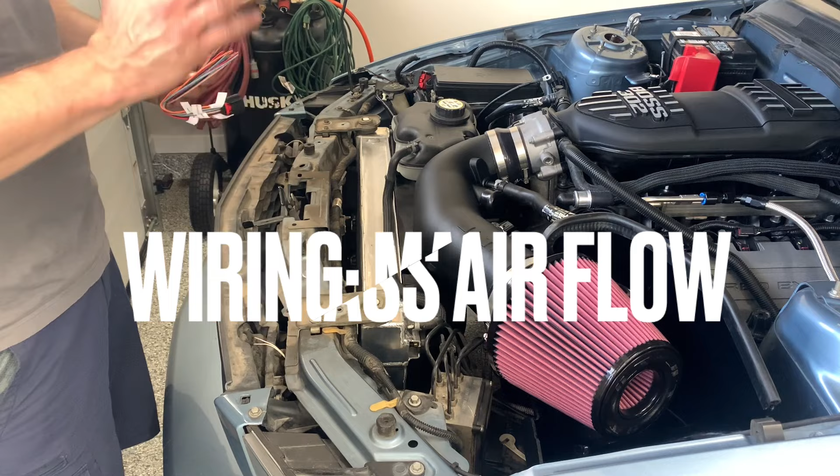Now that we got the fuel system all done, it's time to start with the wiring. First thing we're going to do is probably one of the longest wire harnesses I have to make, which is about 36 inches, maybe even short. So anyway, this is the MAF harness from Ron Francis.

I'm going to hook it up to the MAF and build my own harness. I was thinking about looping it in here and getting it to the body connector, but as you can see, it's going to have to go over there if I want to make it clean. It actually comes up short, so I might bring it around to the engine, which I don't know if I'm a fan of, but I'll show you which way I go once I decide.

One thing I wanted to touch on is that we're only using 4 wires from this harness, because this is for the 05 to current Mustangs. So we're not even using the 2 outside wires.

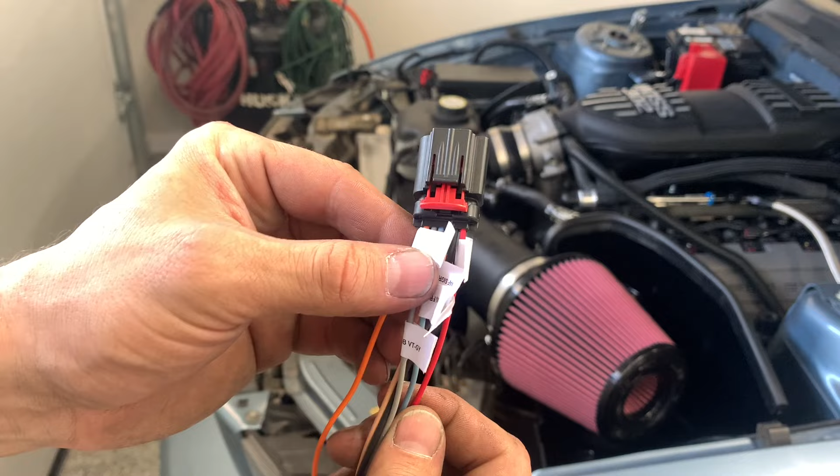I have these labeled myself—this is not how they come. This is from my own research and the spreadsheet, which I will be plugging a lot today, that I know which wires have to go where, which pin, which color it's actually going to go to on my used PCM body connector, which I suggest going. So I have which pin it's going to, they're all going through the body connector, and what color that wire is. This is all pre-labeled months ago, but it's going to come in handy now, and you can kind of take this as your strategy if you want to not use a control pack.

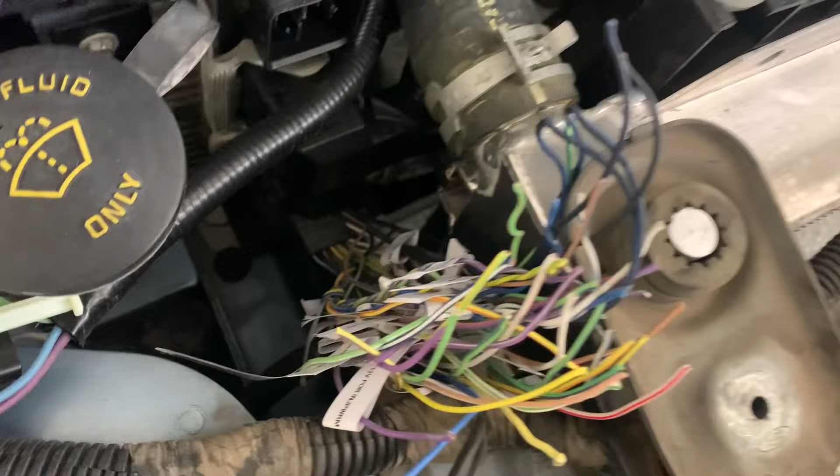After a little further review, I feel like sneaking it around in here is my best bet. I also forgot that I have a bunch of wire length coming off of the body connector—I grabbed that off camera. So I'm going to have the length to work in here, I'll just have to find it. That's also labeled with the help of my spreadsheet.

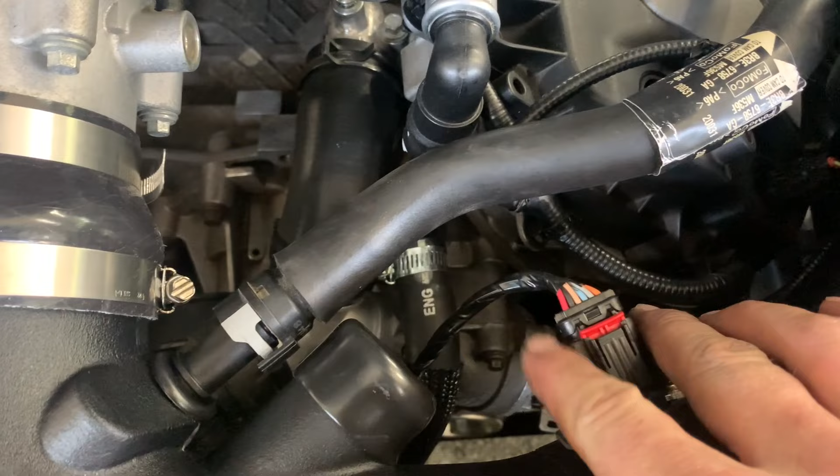A little plug again, but yeah, so what I'm going to do—I already cut the 2 outside wires somewhere down here and shrink wrapped the ends, then taped the ends. I'm going to add some conduit similar to this stuff, make it all look factory, come in through here, and then I can finally put the radiator cover in and have that buttoned up the way I want to. And you notice I got the JLT intake on there, and start wiring this thing.

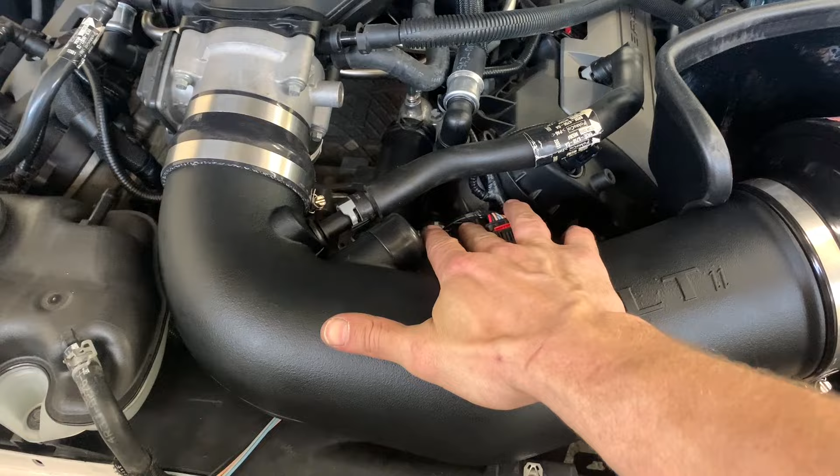This is probably going to be one of the easiest circuits to add, because this was usually part of the engine harness in the 4.6. As I've said before, it's part of the body harness in the Coyote cars. Now, looking at the factory wiring diagrams, this actually goes into the headlight harness, goes through there all nice and neat, and then gets branched off into the body harness connector. This will be fine, but it also makes things a lot easier.

It's going to be one of the first circuits we make. It's kind of a good place to start, just to get you comfortable with pins and stuff. You don't have to take anything apart yet.

I still haven't brought myself to cut that yet, or de-tape it even, but the body connector is plugged in. So before actually making the MAF connections, I'm going to de-tape that and see where everything's going to line up, because I don't want to start having a mess right off the bat. I want everything neat, because this is probably going to branch off into that direction where that one is going. So I don't want to sell myself short on having these wires go there, because I probably want the branch to come out here. So there's still a chance I might come up short with these wires. Just a little hot tip there for the MAF side of things.

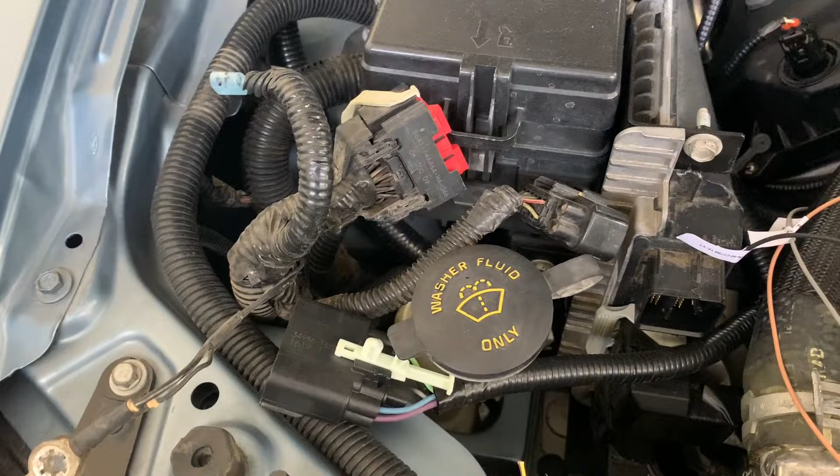Before I proceed, I'm thinking I might take the washer fluid tank out to just have easier access to everything, because I think one of the things I'm dreading is getting in there and not having enough room to crimp stuff right, since it's the bottom connector in the PCM. So I think that's what I'm going to do—maybe a hot tip.

We'll see how it works. I'm not sure how it is to take out, but it's probably just the inner fender liner and maybe a couple few bolts. I decided to take the plunge, and I know it's definitely gonna be worth it.

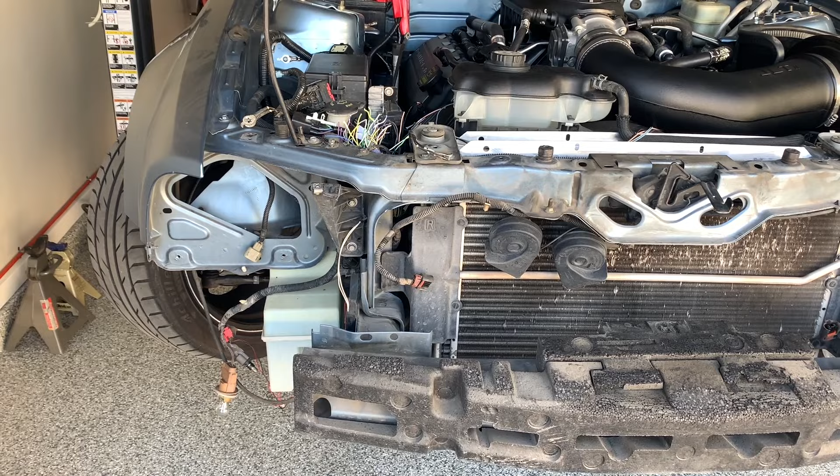Bumper delete, headlight delete. Next is washer tank delete. What's going on back there? Oh, look at all that angle.

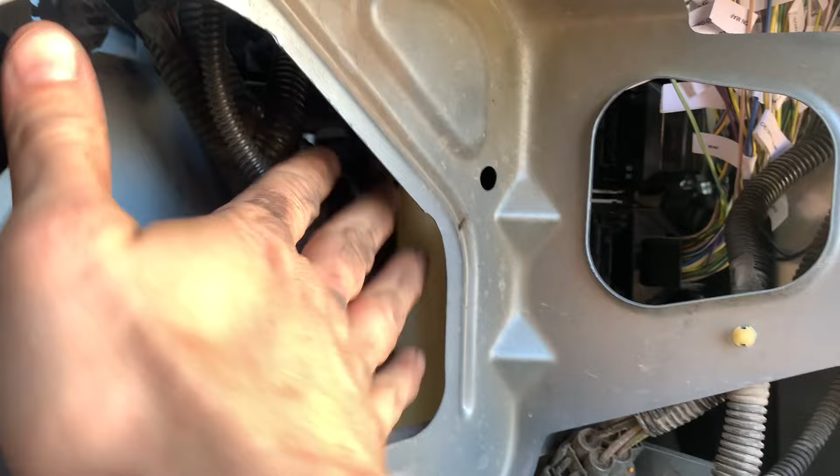So all the wiring is going to end up being right behind here where all the splices are going to end up. So I figured it'd be a good idea to get rid of all this stuff, especially the washer tank. It's going to be right in the way. So yeah, I would definitely do that if I were you.

I got the fuse box unlatched. You notice there's one big connector missing, and headlights out, ready to work on over there. That missing connector is actually from the engine harness.

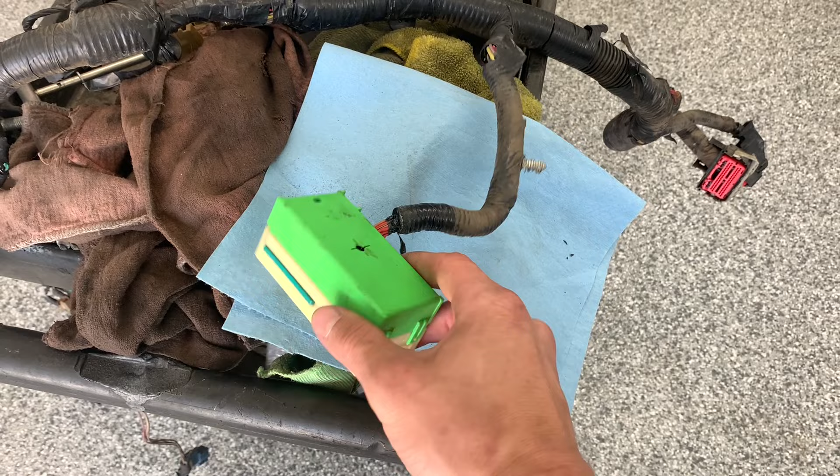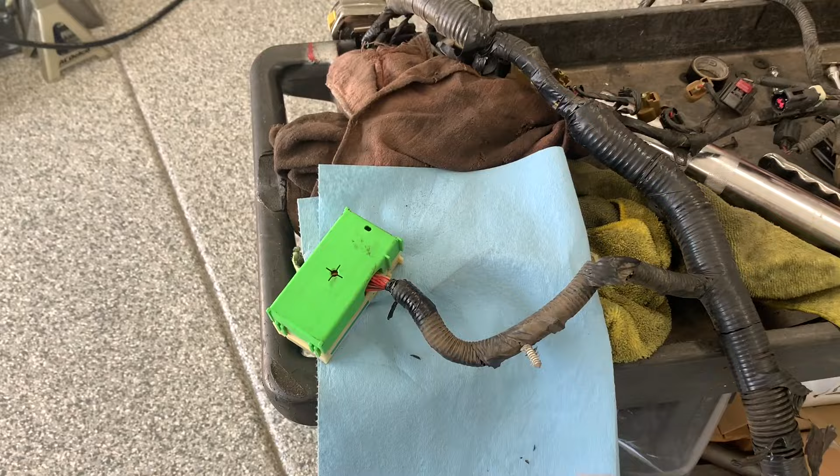So this is what they did for the inline, to feed the coils, injectors, all power. Your starter feed wire is in there too, along with AC requests and whatnot. So I'm gonna be untaping that and kind of get as much wire out of there as I can so that I can reach it without having to make too many splices to the inline and other circuits that I gotta make.

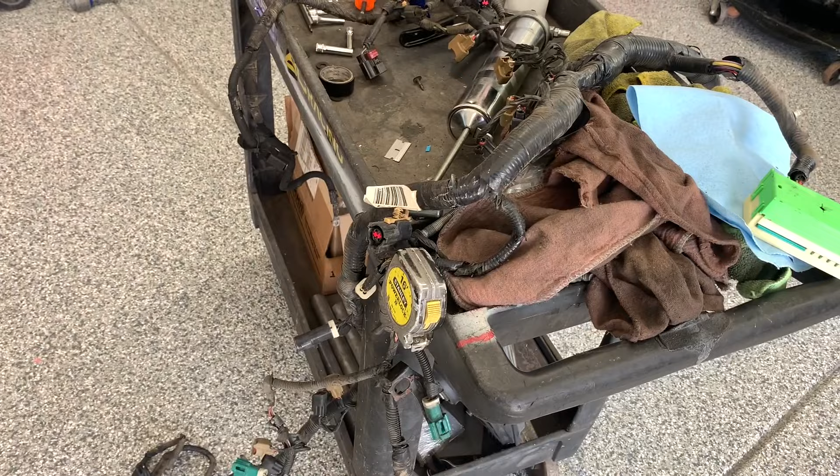So yeah, and got some loom wire. Probably only have to use this for the mass airflow sensor. And I'm gonna make it all nice and neat.

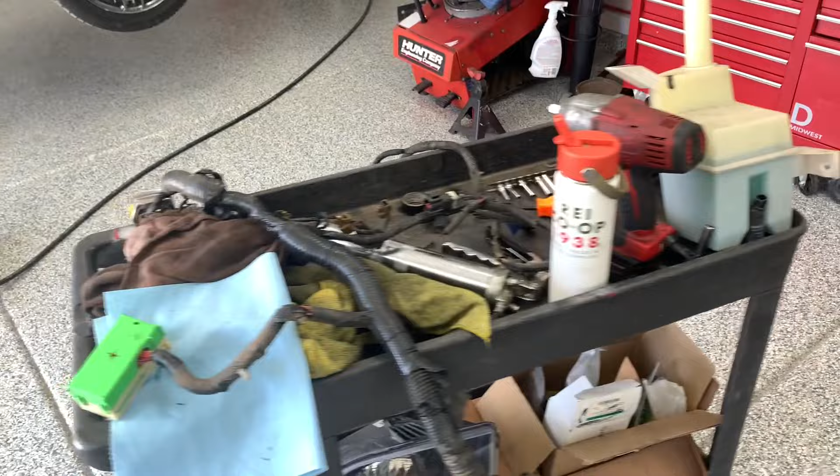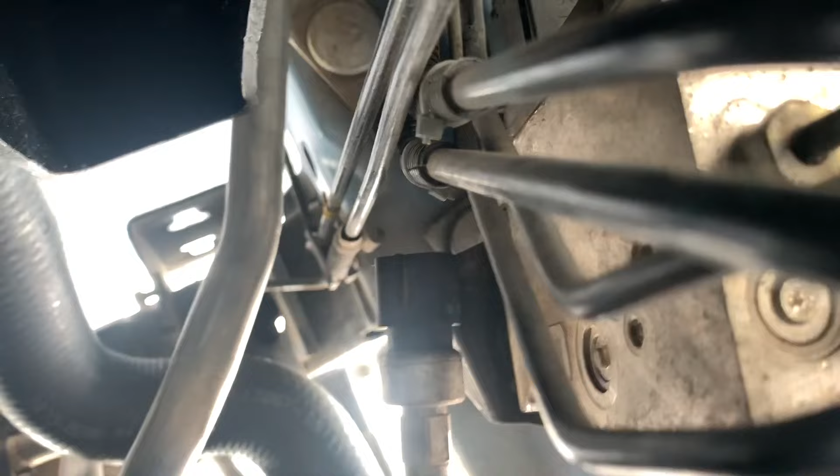So here we go. Another item I want to point out that we're gonna have to make a harness for is, see that little connector there? That is the dual switch for the AC.

So that was also tied into the 3-valve engine harness. So we'll have to use those wires and connector to make it all work so that we can wire it properly. I'll get more into that later and exactly how we're going to do that, because the Coyote cars didn't really have a low pressure switch.

So what they used was a temp probe in the evaporator. So there's a workaround on that, and I'll cover that a little later once I get into it.

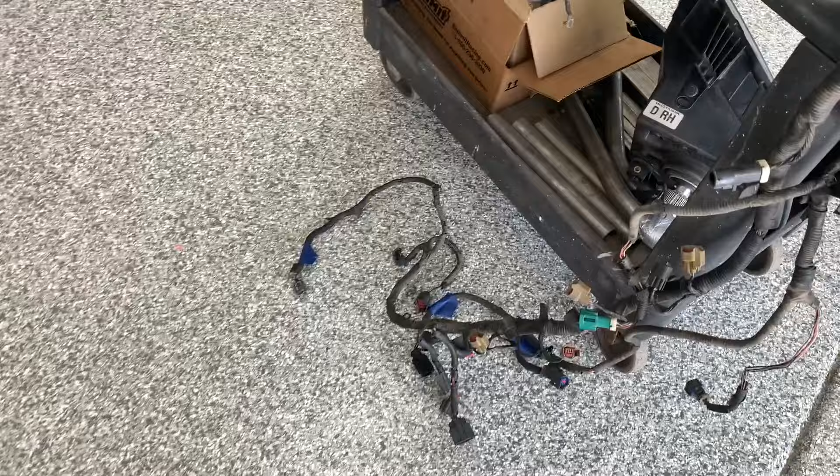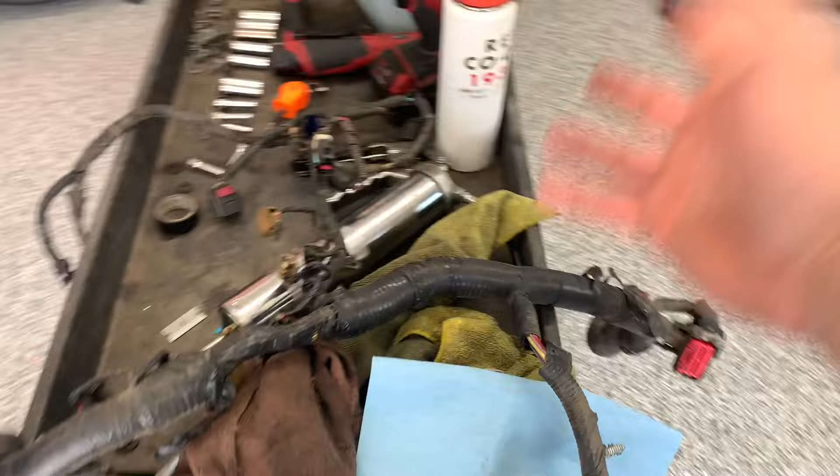In light of all that, what I'm going to do now is untape. That's the AC pressure switch connector I was telling you about. Basically gonna run that thing all the way back and untape this whole thing as much as I can to get as much wire out of this harness as I can.

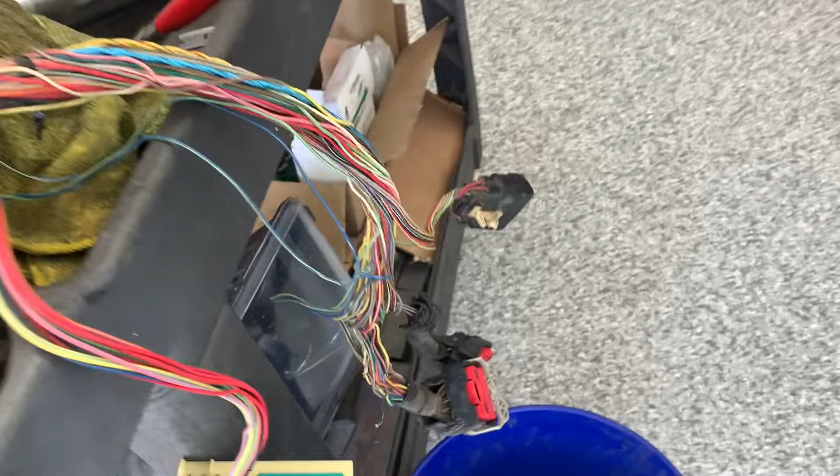So I got most of this harness pretty much all peeled back. And like I said, I'm gonna use pretty much all these wires. I'll figure out which ones I don't need depending on where they are.

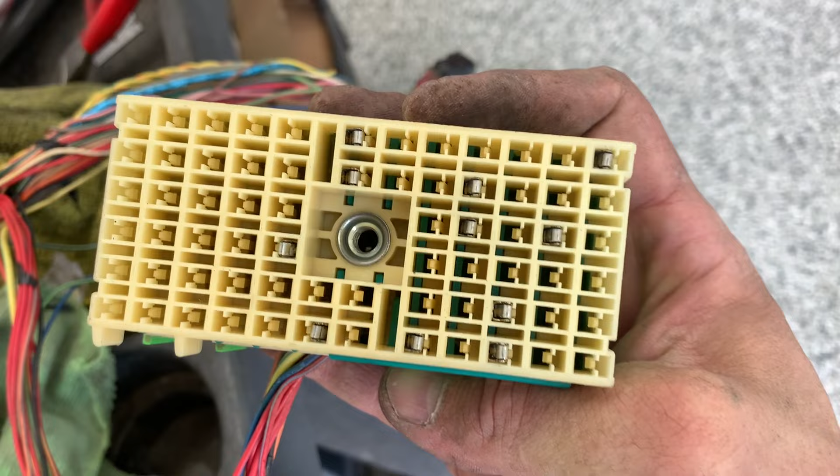There's not such a big connector. There's what, a dozen wires in there. I can tell you right now, I bet that one's the starter feed. And then there's some wires that went to the engine harness connector. I can't say what they are off the top of my head, but I have a spreadsheet that'll tell me.

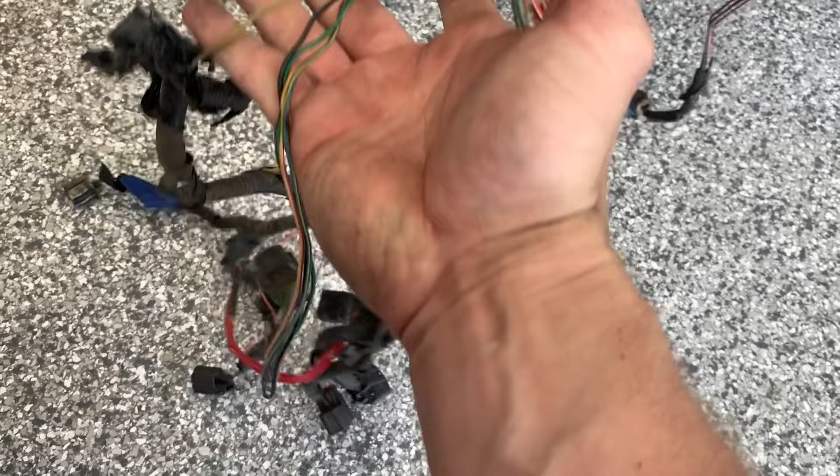And I tried unlooming the, where'd that go now? There it is, the AC pressure switch, as much as I can. But I'm just gonna have to find the wires along the way because I want as much as possible.

So yeah, lots of wires. And another thing I want to touch on while we're here, I labeled these while I was taking this off the 3-valve, because we're gonna use these two.

This is for the speedometer, and tie that in, use the pigtail anyway to hook it up to the Coyote harness, because that's a 3-wire, this is a 2-wire. We'll touch on that later.

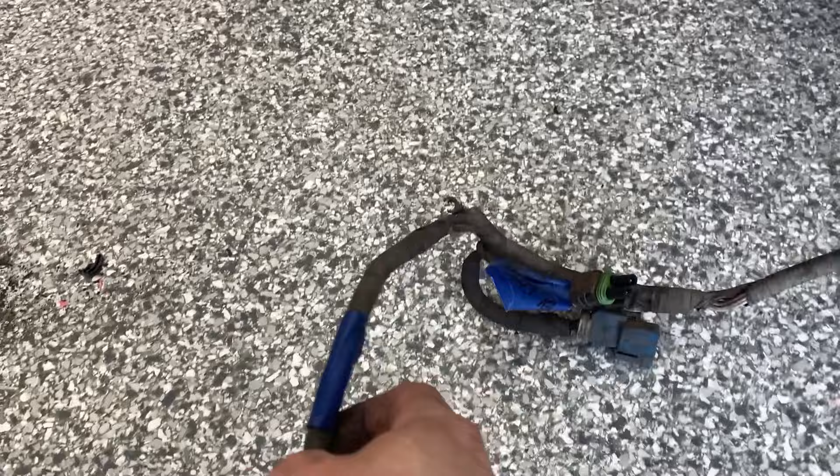And the reverse light switch, which might be the same, might have to just extend it, because I believe there's a connector in the trans harness for the Coyote that looks just like that, but I'll touch on that later.

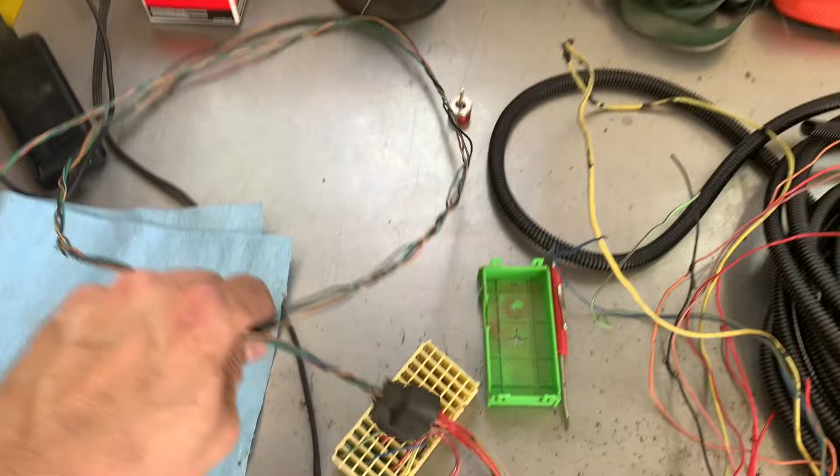So now that all the tape and loom is off, I'm gonna get as much of that AC pressure wire out of there as I can, and as much of these as I can, wherever these go. A lot of power feeds. So, got the dual pressure switch for the AC completely stripped.

So we'll need all those wires, and those will actually just transpose right into the Coyote wiring, if there isn't any trickery there. I'll get into how to do the low pressure side and how it's all gonna work later, like I said.

And now we got this, this is the C1035B connector that goes to the fuse box. So we can tell the thick wire is going to go to the starter. That's all I really know offhand. A lot of these red wires are just 12 volts with the ignition, and so on and so forth.

I think I'm gonna reference my wiring diagram and try to label them all so I know which one is which. Gotta look at the connector view in the manual and see what corresponds with the colors, so I can get more prepared. I still have yet to cut the body harness over here. I don't know, I'm just trying to do things right, not get ahead of myself. Kind of want to just clean up my area, keep things clean. I think that's gonna be my next step, is to label it.

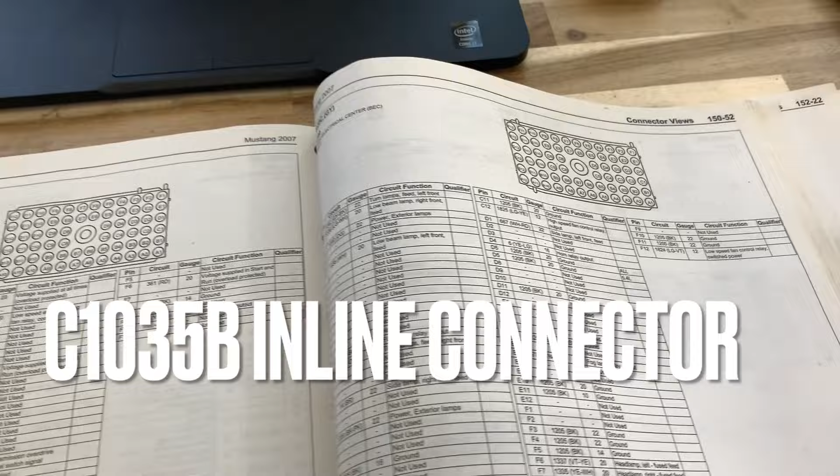Touch base on how valuable these factory wiring diagrams are. So this is an 07 Mustang.

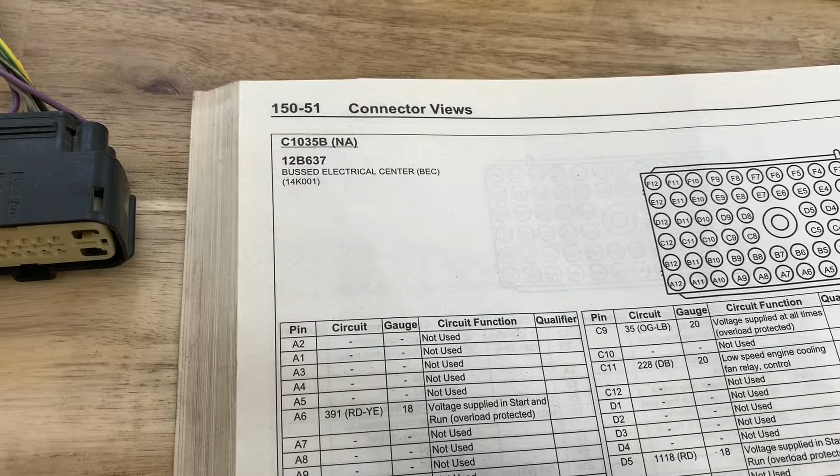Here is the C1035B. And B, I believe, I don't know, usually means body, at least on the PCM it does. You see it correlates here. And I have, good God, stuck on something.

Anyway, the wire is here. Connector is upside down according to the map. So you can see the little tangs there, so we're looking at the right stuff. And you can see all the not used and whatnot.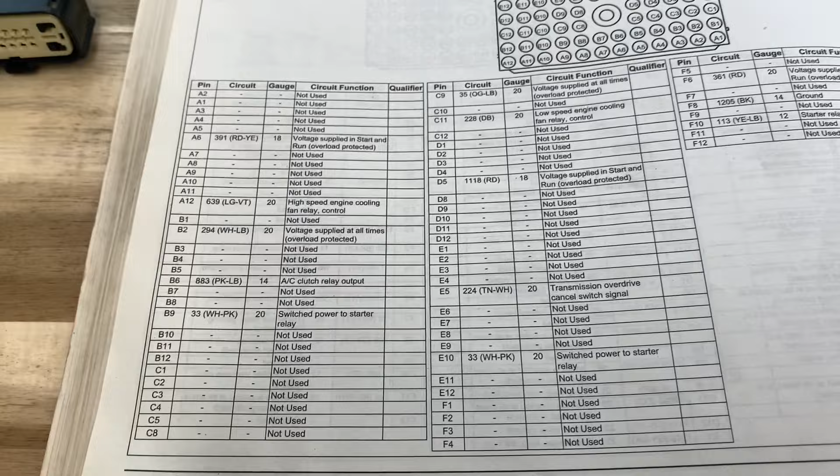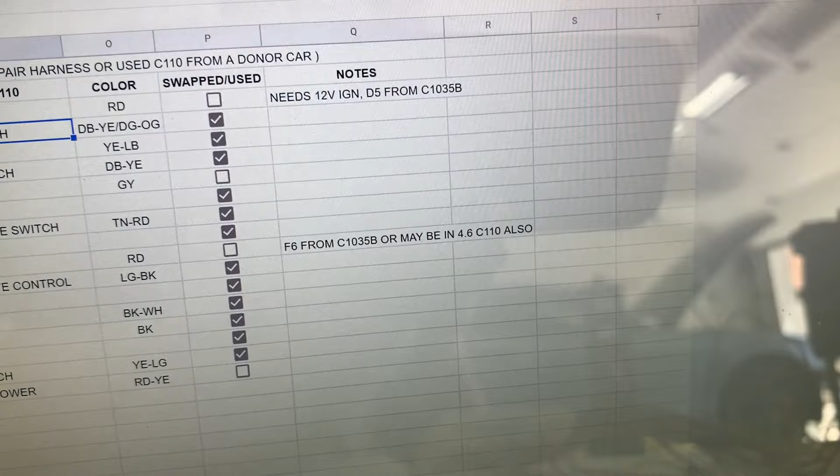This is the first time I opened this page, because I never thought to. I just looked at the wiring diagrams, and never had to look at this page because I didn't have this connector out, I was driving the car. But in my spreadsheet it shows like F6, stuff we're gonna have to connect certain things to, and so on and so forth.

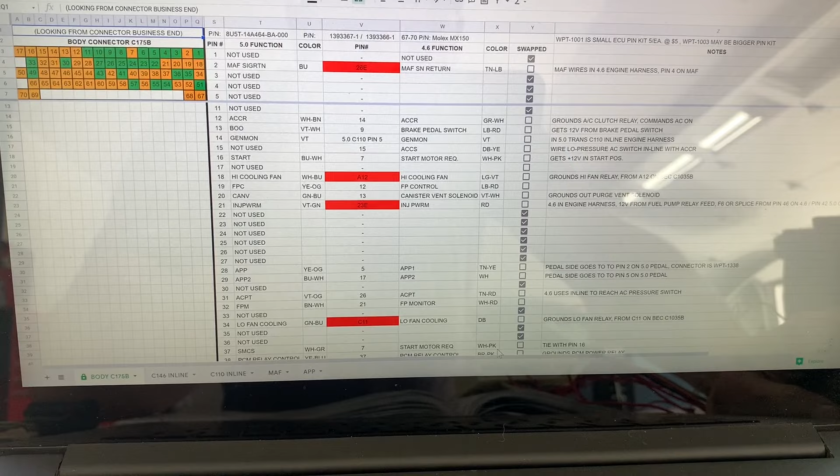Trying to find, there is a spot, I know there's a couple things that get the ignition wire and whatnot from this.

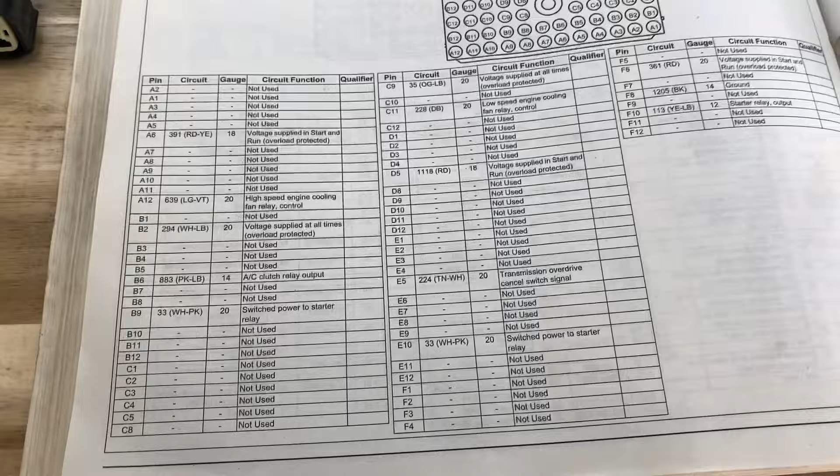So what I'm gonna do now is go get my label maker and label all these wires, so when it comes time to get to the car, I'll know exactly where they go. By label maker, I mean some masking tape. I don't think it's necessary to get into my actual label maker here, just to save time, it's just gonna take too much time.

Not too bad, like I said, I don't even think there's a dozen wires in there. Got them all mapped out. I'll show you what they all do.

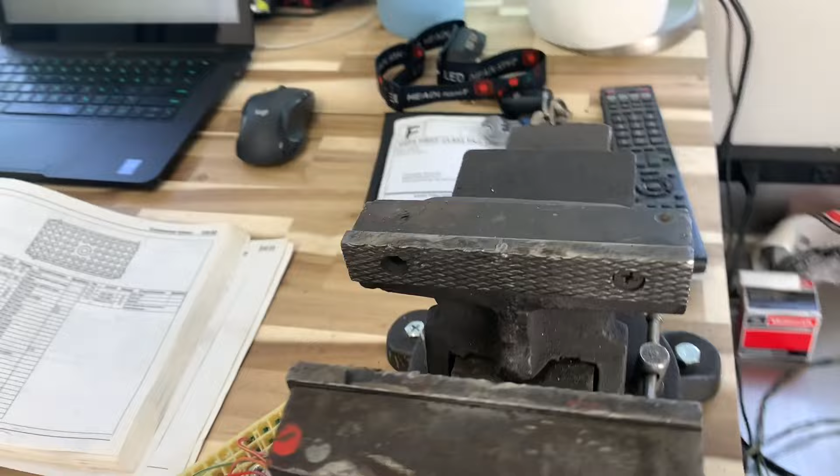Luckily, I figured red was going to be the case, but this is really fortunate that a lot of these are 12 volt ignition, because we got to power up a few circuits out here in various places. Got a ground.

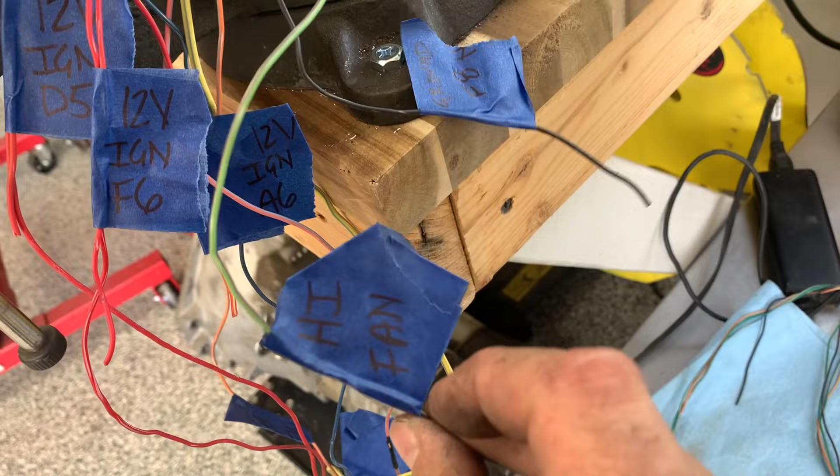This will go to the PCM to ground the high-speed fan relay, and then there's the low, which is this one, and then I guess correctly that's the starter output.

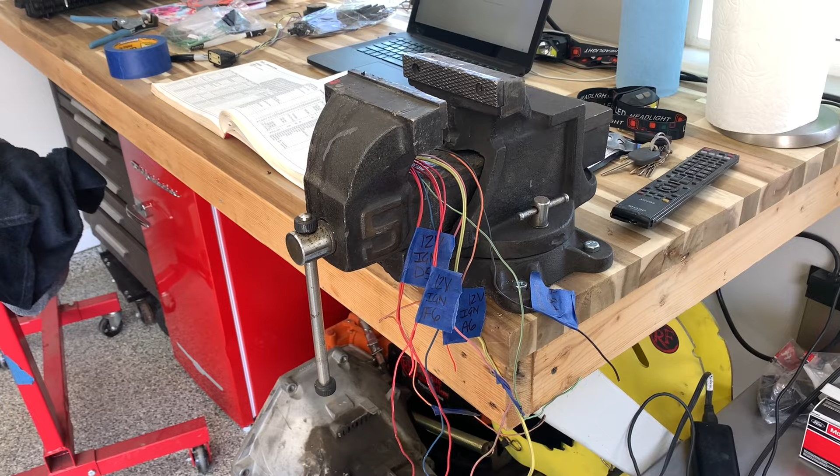So now I think I'm going to make the harness, because everything is, let's go over here. So I didn't notice in my last video, or earlier, had this all mapped out, and now that I know where this is gonna go, everything's gonna kind of end up in here, all the connections.

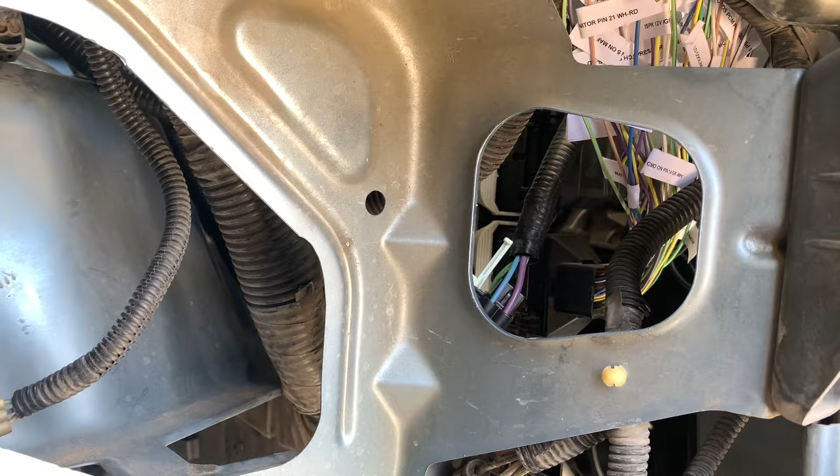So I'm probably gonna route this mess padded over here so I can get a better idea of where it's all gonna be laid out. And I forgot to mention that I'm gonna take the inline of the 4.6 that bolts in here and actually bolt it in here, have it come out like it will, so we'll be able to know.

I guarantee I got enough wire over there in that harness to reach wherever everything needs to go to. Oh, we're doing it. Pretty monumental here. I did one wire.

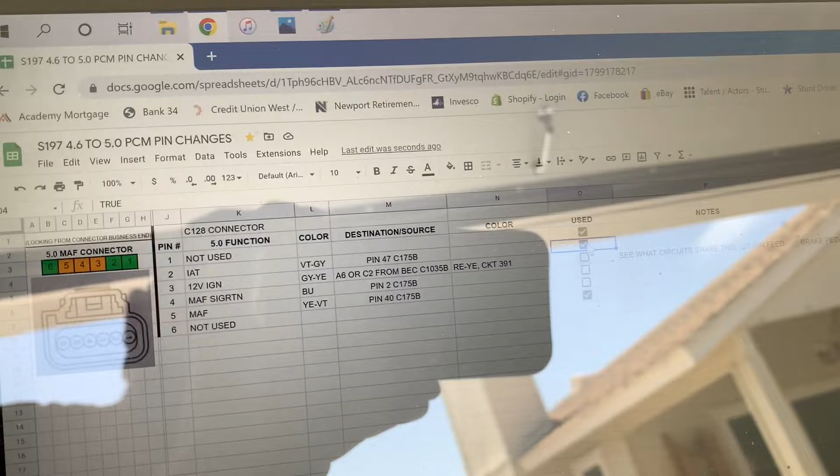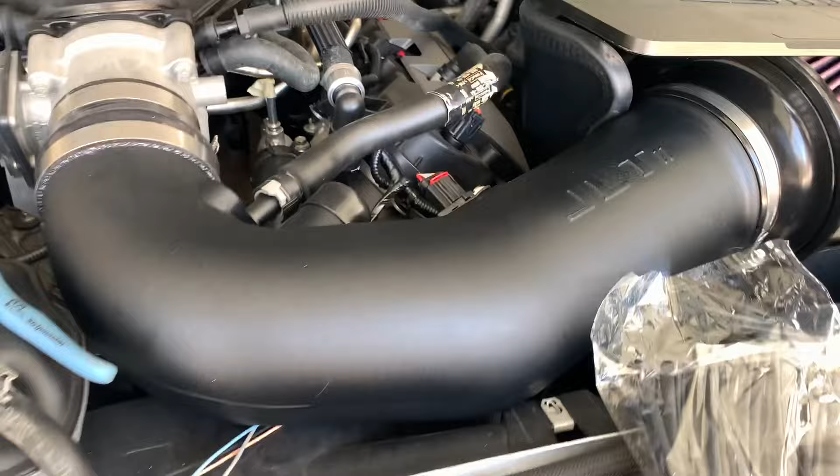One thing you gotta remember with the Ron Francis wiring is that the colors don't match anything as far as the Coyote or 4.6, so it's a good idea to label them. I am adding pictures of the connectors so that you know exactly the orientation of which way the wires go. So keep that in mind if you guys are interested in purchasing the spreadsheet.

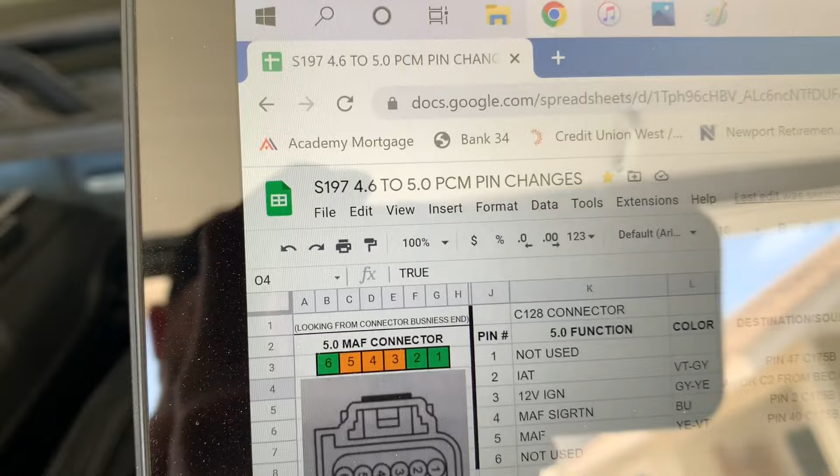So made my first checkbox. We're green on pin 2, the MAF, it's going to pin 47. I'd like to thank Past Matt for bundling all the MAF wires however many months ago, so I know all my MAF wires are right here except for the 12-volt ignition, which is probably going to come from the inline over there. So made a crimp connection, shrink tube. Now we'll carry on.

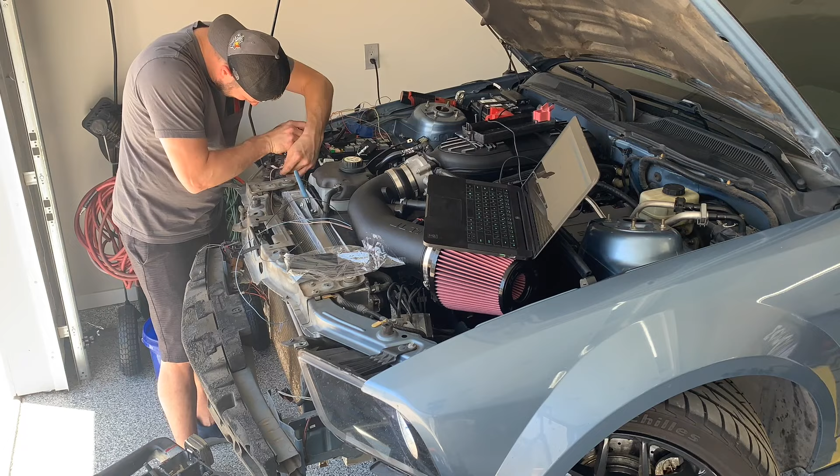I had to take a quick break, had a little visit from someone actually from Ford while I'm working on this car about the airbag thing, because I haven't done the recall on it. He's like, 'Is that the car right there?' I was like, 'Oh yeah.' He's like, 'Well, it looks like you're working on it,' because they do mobile services and stuff. I just thought it was pretty funny that he just kind of walked up.

Since it was noon and I was hungry, I decided to untape the 4.6 body connector that was going to the PCM. This is just a 12 volt signal, I believe. When I first converted to EPAS, or sorry, electronic rack, it needed a 12 volt power source on low amperage, so that's what that is.

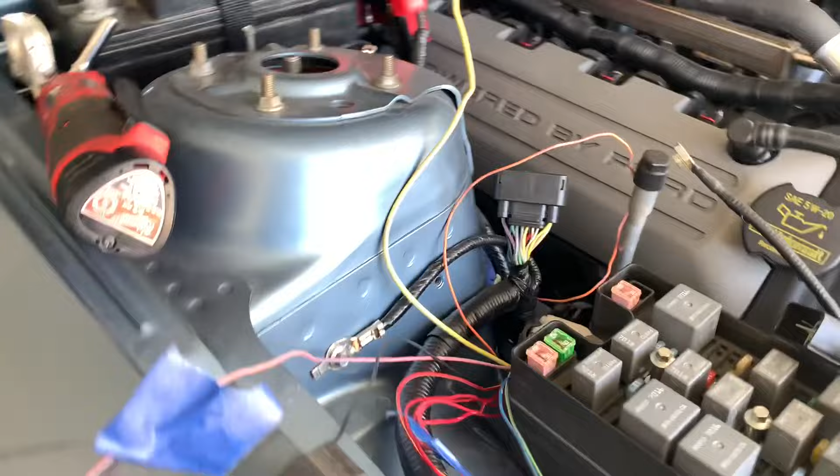So I untaped it as far as I'm gonna need, because I want to know where the pins are. And while I was waiting for my Uncrustable that I already ate to unthaw in the sun, I kind of mapped out how I'm gonna need a 12 volt ignition to complete the MAF circuit, and that'll be done. All these red wires are actually 12 volt ignition.

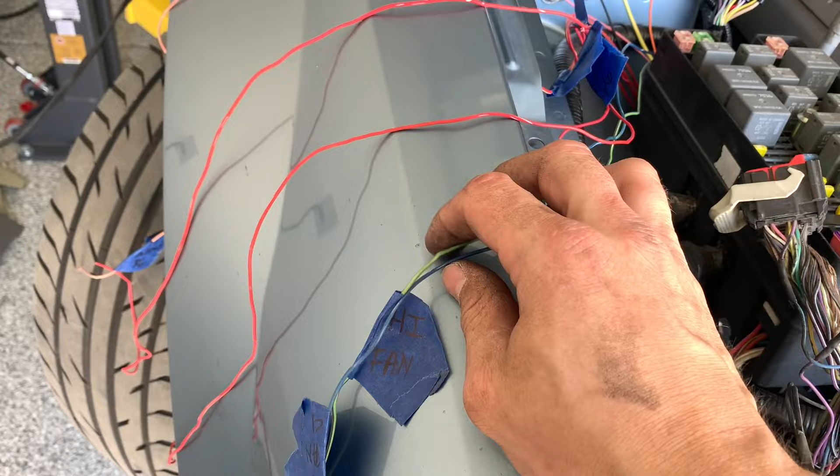These are our fan wires for the trigger, those are gonna go to the body side. This is gonna go to the inline for the transmission connector. Same with the 12 volt all the time to the alternator, that's going to the inline to the transmission harness. And this is for AC things and a ground wire.

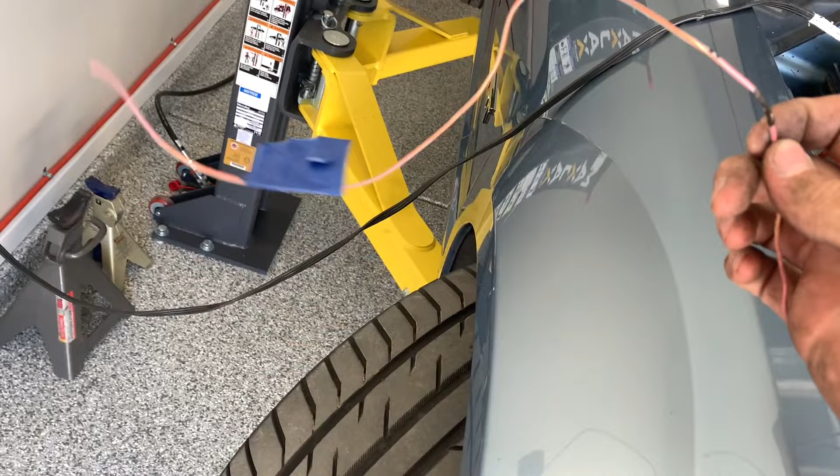So I was like, oh man, I didn't want to just hardwire this thing in, but I think that's gonna be okay. It's not really hardwiring because we have the big connector here, it can all come apart. It'll come apart here, but then still humming and hawing, because this will all kind of stay body side. So it will be okay if I hardwire this, because these are going to be hardwired to other circuits that need 12 volts to the engine inline and whatnot. That's the whole point of it.

So that'll be able to disconnect at those points. And I think if I ever wanted to take the harness out, all I gotta do is take the MAF out. So no big deal.

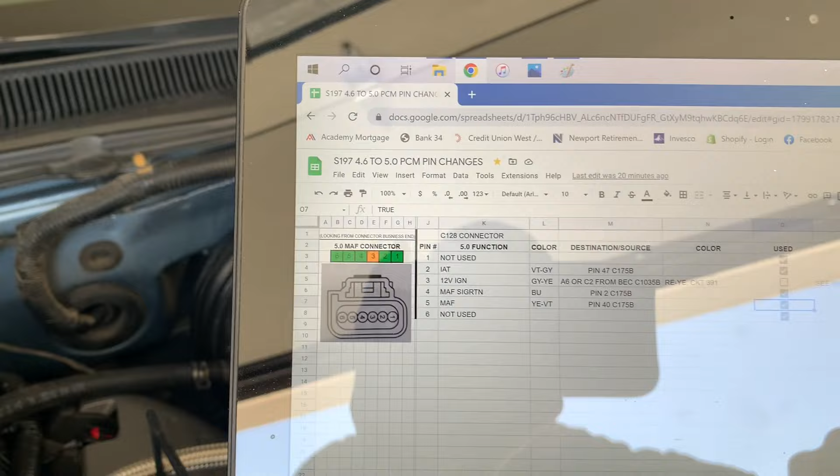So I'm cruising along, I'm feeling really good about this. It was very daunting at first. But as I continue, like I showed you with the MAF, I put a picture so it'll be easier to follow, because you could have those flip-flopped when you think about it, so you can know exactly where they're numbered. Once I get to that connector, I'll be adding pictures of that to the spreadsheet, so even myself, as I'm going, know.

Like that, MAF circuit is done. Got it all loomed up, not completely taped up. That's where it's going to branch out into the main body harness on the 5.0. I think now I'm going to work on the trans inline connector.

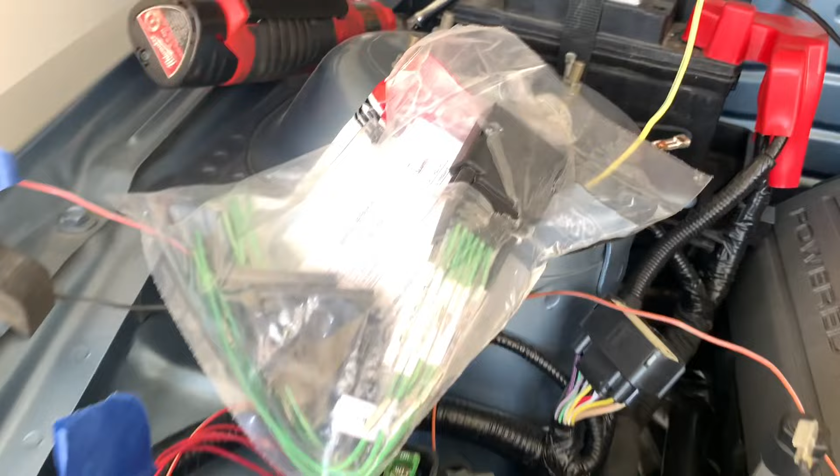Let me scoot over here, refresh your memory on the inline connector that we're going to use to complete all those circuits. We're going to use most of these, and connect it. I already got them all labeled, because Victory loves preparation. I have the trans inline connector. I'm gonna throw a picture from the manuals, and then just dial this all in. I think that's a good next place to start.

I think the most I'm dreading is doing the pedal harness, only because I gotta get my big ass in there. Luckily, my lovely Rebecca took the seat out a while ago when I was doing the fuel pump, so I gotta get in there and do some wires in there. We'll show that later, but let's do this trans business.

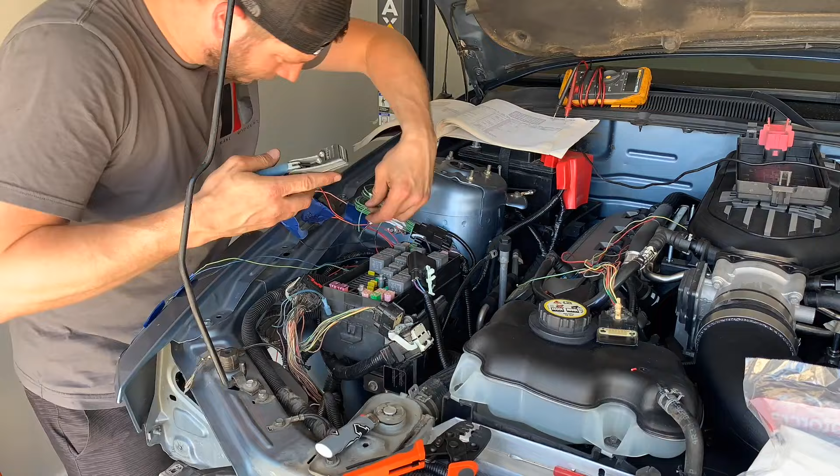Inline, we're at the alternator wires, GenCom and GenMon, communication and monitor, essentially, for the alternator. There we go, these two. So they both get hooked up to the body side of the 5.0 connector to kind of regulate the alternator regulator.

As you can see, those are my wires I got to hook up, and that's the end of my wire. So I'm gonna have to put an intermediate wire, unfortunately, in there. If you are getting a used body connector, maybe even try and get the whole body harness so you can get more wires, because I had someone just send me this and I actually told them where to cut because I thought it'd be plenty, but turns out it's a little short. But no big deal, use the standard crimp method that I've been using and just keep moving forward.

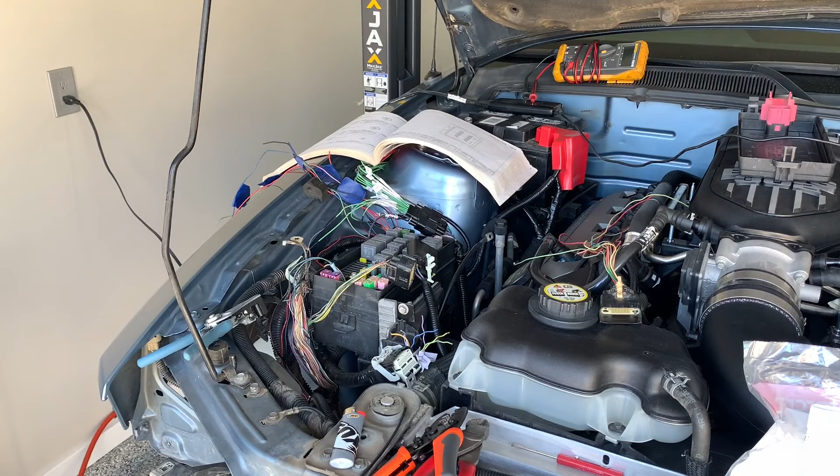I got to my first wire in the order I'm doing things anyway. We got 5 wires done with the trans inline. Got the alternator wires hooked up, component power, starter wire, all that good stuff. An unused wire, just shrink tube the end of it.

But now I'm into the clutch pedal position switch, which is from the body harness. So basically the car is looking for the clutch switch position, whether it's open or closed, pressed or not, and the wires end up somewhere in here. So according to the map here, it's pin 33 of our 4.6 C175B connector. So like I said, the factory harness, or the factory manual connector views, comes in so clutch.

And so I got pin 33, it all correlates, the color, so I'm just gonna basically search for it here and then hook it up to my inline. So I found the wire I'm looking for. It's a light blue and yellow wire, so that's our clutch position switch.

We're running into another short situation. I don't want to bring the harness open back any further than I have to, it's just gonna be messy. So I'm just gonna cut it right about here, kind of do the 2 splice thing so that the wire can reach. It would almost reach, but I don't want to take that shortcut. I want it to join these other wires that I already got connected with the MAF and the alternator. So I want it to go back down here and then kind of route it under, so it all reaches nicely when I tape up the loom.

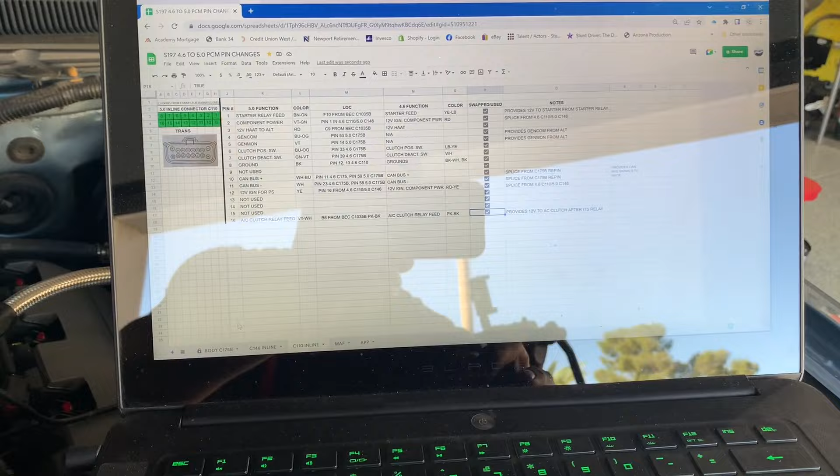So I think I'll start on that now. I lied, I'm actually gonna move on to the inline connector. For the engine harness, it's 4 wires, should be super simple. I believe it's at least a power, ground, and whatever else I jotted down in my spreadsheet.

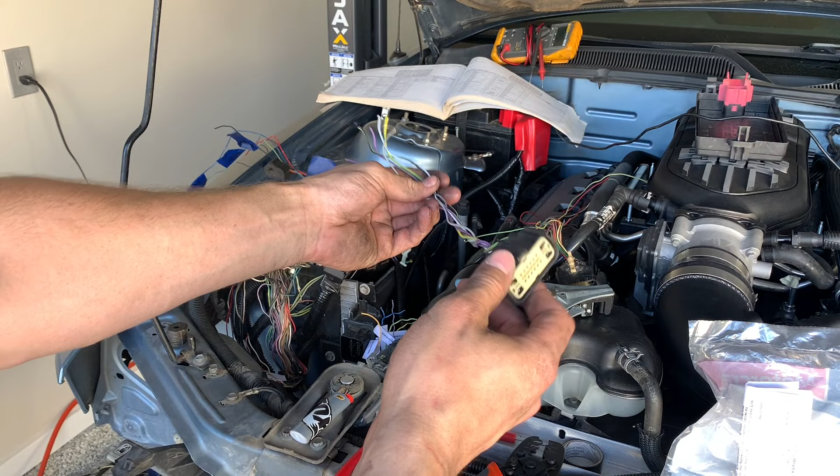What that entails is using the inline from the Coyote car. This was actually a part of the body connector to the PCM on the Coyote.

Unless there's a repair harness, but it's going to have all 16 wires in there, but this will correlate just about directly, actually not, but the positions of the wires are what matters, is that they're all pretty much where I don't have to repin anything or anything like that. So that's good, so I'm gonna have to figure out where all these are.

I know the gray wires are for the oil pressure sensor, and there's some component power, and I guess by the black wire there's ground. The thing I'm gonna have to figure out is kind of where it's gonna lay.

If I'm gonna have it hang out where the 4.6 inline was, have it kind of swoop around. It all depends on what wires are gonna go where. I think there's plenty of room for it to go under here and hang out with these guys. Once the engine harness is plugged in, there should be plenty of room there. But I'll figure it out as I go, and I'll let you know.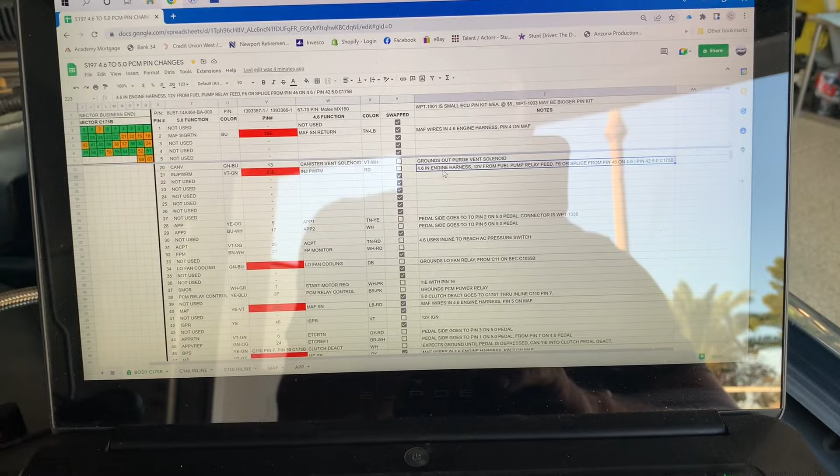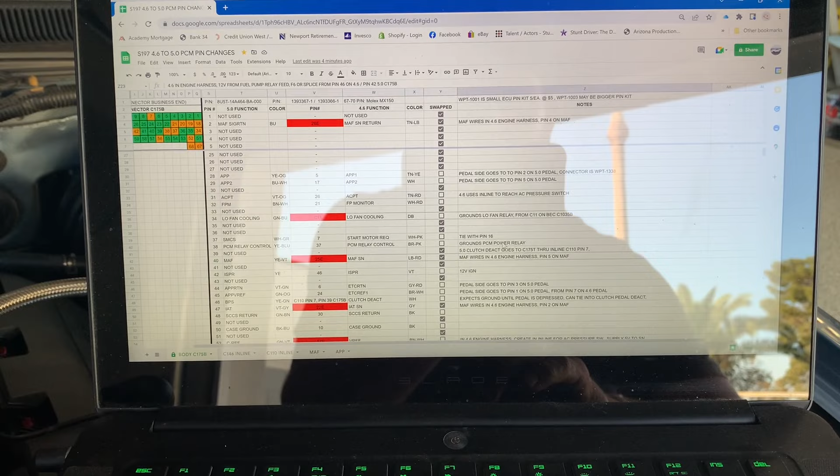So this injector power needs power from that connector and wires. Let's see if there's anything else in here that needs 12-volt ignition. That's gonna be a crossover, it doesn't need it from there. Yeah, so there isn't many. Everything else is gonna transfer as far as getting power from these wires.

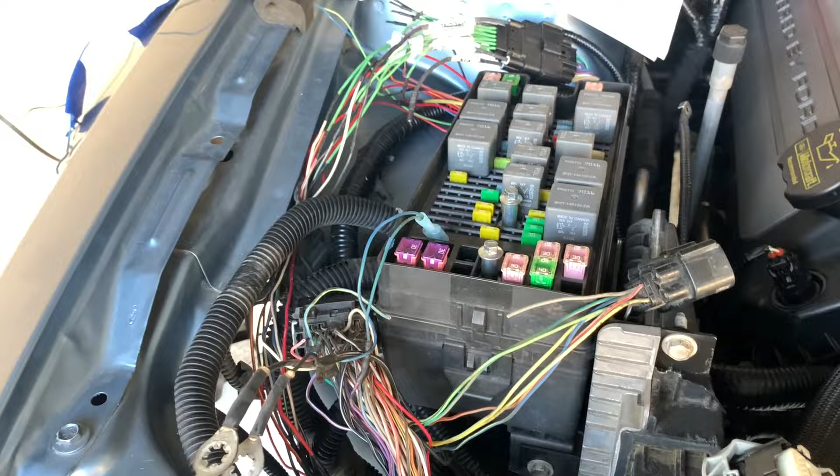So I could actually use one of these that are powering up the PCM or something for that injector power wire on the 5.0 side, or I can use, like how I originally planned, one of the wires, maybe use it because there was one I had to split. So there were 3 wires on the inline that needed 12-volt power, but I only had 2 left feeding there. So it just made, you know, where...

Is it now? Yeah, there it is. It made the 2 go into 1. So they're on a circuit, this one's on a circuit. And I'll probably either use the injector power wires that are already in the 4.6, or use one of these, just cut it, do another splice, using one that hasn't been used to split or to power 2 other wires, so that you don't overload that circuit.

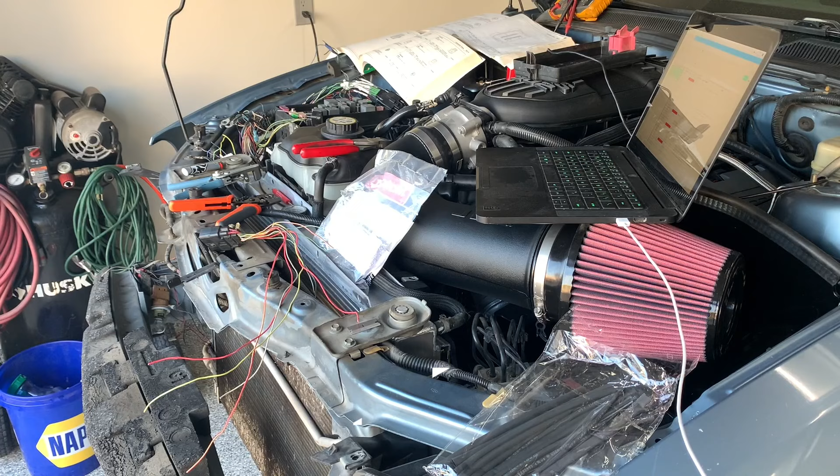Just mentioned about that inline connector not knowing what everything goes to, but I'm gonna kill 2 birds with 1 stone. Here is the transducer pressure switch for the AC, the connector is down there. Now this was part of the 4.6 engine harness, but now we're going to have to make our own harness to connect to the body harness of the 5.0. And all of these wires, at least 3 of them, connected to the inline of the 4.6. I cut them, obviously, and didn't know because I knew I needed the wires.

So if I were to just hook this wire up there, this just goes straight to there. There's no wire to really hook up to the 5.0. So I'm gonna have to make a harness, or just kind of loom it, plug it in, route it next to the MAF, and plug these as I need to on the spreadsheet to get the AC working.

So this is the straightforward part about the air conditioning. The dual pressure switch hooks directly, just like the 4.6, where there's no funny business. What we will have to do is on the low side, and I will touch on that later once I get to it.

Down there, pressure switch. There's the wires, the only ones that are not wrapped or loomed. Routed nicely, plenty of wires to get it to where we need. So it's kind of a hot tip. I don't think I've ever seen anyone mention that in any forums or anything, on what you actually gotta do.

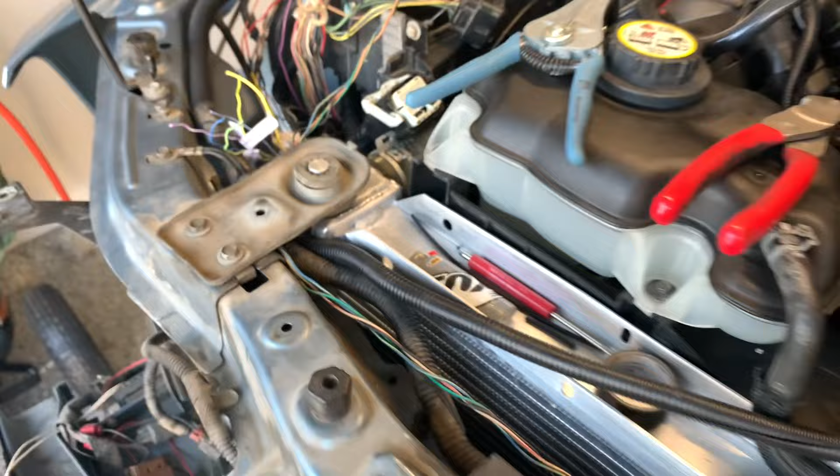Or that it was part of the 4.6 engine harness. So that'll splice straight up. I don't have it, that's not really part of it, it's not on the spreadsheet, but the wires all correlate to the body connector of the 5.0. And while I'm doing this, if I find out otherwise, I'll definitely let you know.

Well, that's day 1 of getting the wiring kind of sorted out on this. I probably spent 14 hours today, pretty much straight doing it. Probably about 75–80% done. Haven't done the math.

I already shut down my laptop, but I can't stress enough how much easier and more confident this whole wiring project has been. Otherwise, I would have been spending so much more time on the back end. Instead, I spent the hours figuring that out on the spreadsheet, or at least figuring it out in the first place and getting it dialed in.

So still got all these wires on the 4.6 body side, and there's probably an equal amount of wires left on the 5.0 side. So maybe 80% was generous. I'm probably 65%, but it's going smooth.

Yeah, so I'll get back on this probably the next day. And we're back. It's the next day, a little later in the day because, you know, day job things, but I'm gonna continue getting after these wires.

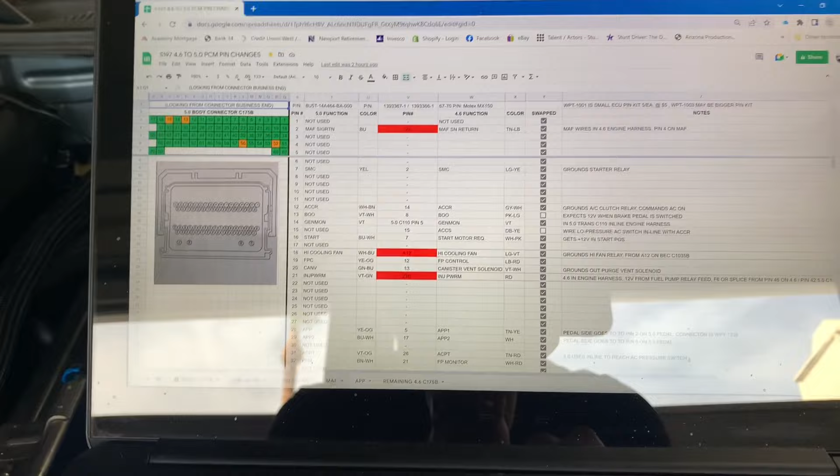All right, now it's the next day since the last time lapse we saw, and I have this sheet completely filled out. You can see I got a couple outliers, those are the AC, but everything is done except pedal, which I'll get to. Got everything in the spreadsheet done. We're all green except for the accelerator pedal harness, which is 6 more wires.

But as you'll see, there is a whole bunch of 4.6 wires left over. So most of these, I do know where they go. This is AC stuff. This AC wire is just going right back to the 4.6, the tan and red. That's the pressure one. We already used that, directly from the switch in my own harness coming from the sensor itself.

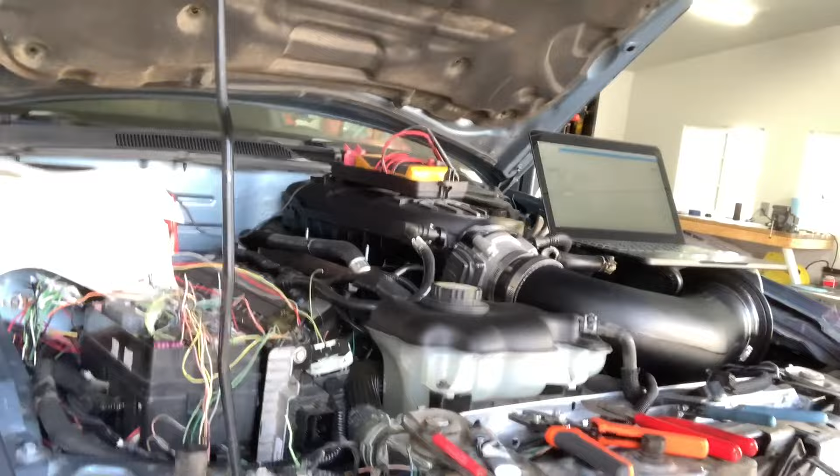And I did find one mistake after further review. I don't remember how I found it, but the brake switch signal that I was using was actually the wrong one. So I just got to switch that, update my spreadsheet. It was basically the opposite.

I hooked it up to the side of the brake switch that is 12 volts on all the time until it's switched, and the signal that I want to give to the BOO, or brake on off, is just the opposite. And I found that it's pin 8 in the 4.6 harness. So just got to make that correction and reroute from underneath the dash.

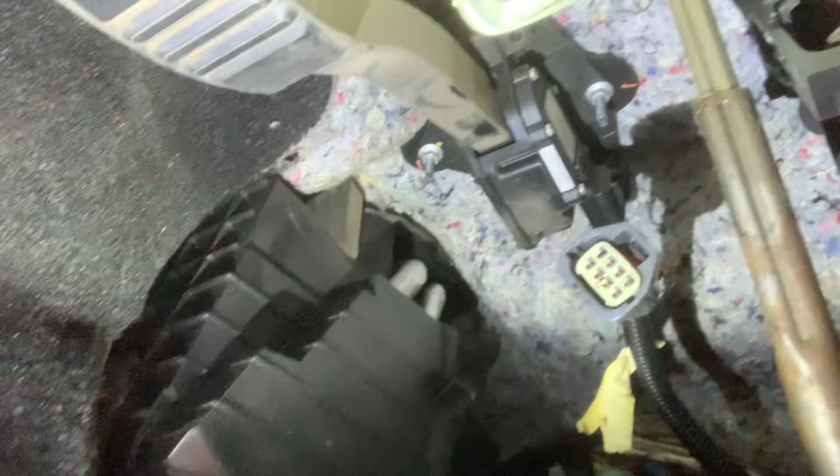So the accelerator pedal actually isn't all that bad to get to. A lot of room there. I guess I was used to the Fox with the Coyote and 3-valve pedal. So I'm gonna rip that thing out of there, do the wiring quick, get it over with.

That was by far the worst I had to do under a dash. I'm not small and that was tight, but the pedal is wired.

But before I power it up, I still need to figure out what all these wires are. I do know there's a brown or tan, one of these is the 7th wire from the accelerator pedal from the 4.6. 4.6 uses 7 wires, Coyote uses 6. So I'm gonna figure that out, and then I'm gonna hook up the battery and turn the key, just like that.

Coyote didn't have an airbag monitor. I'm guessing it communicates with the body module on the actual Coyote cars. And as far as the signal wires, there's no connection for those at the PCM, so I just shrunk tube them, let them hang out in case we need them later. And so now, I guess I'm ready to give this a little test.